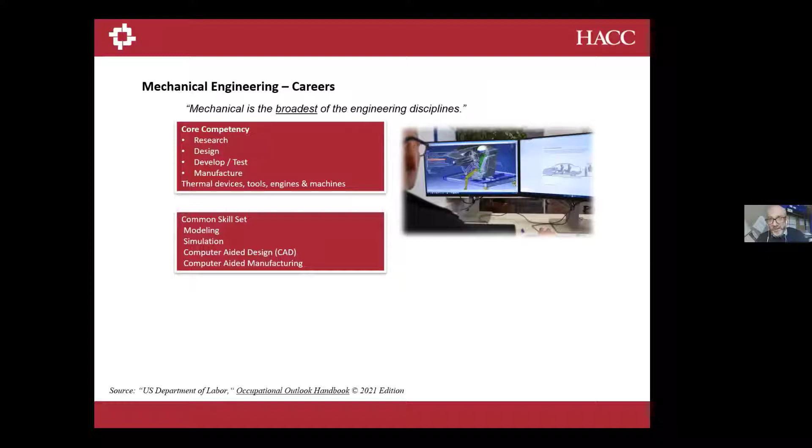If you look at a common skill set, modeling, simulation, computer-aided design is huge in mechanical engineering, and so is computer-aided manufacturing. If you look at this picture, that's a typical workstation - just two monitors. I don't know why electrical engineers usually have 3 or 4, I always would kind of poke fun at them for that, but MEs typically have 2.

Casual dress typically - you can't come to work in rags, but I think a nice pair of jeans, sweater, whatever, it's kind of office casual. I don't know how many jobs are remote right now, COVID has shifted everything, so I think a lot of things are remote. I will say that office spaces have become open the last couple of years.

So you used to be in a real tight cubicle. There seems to be an emphasis on collaboration in engineering now, so open office spaces are a lot more common. It's pretty casual dress, but if you're making a presentation or a customer is coming in, it's not uncommon for the policy to be: don't wear jeans that day. Put it together, look buttoned up. That depends on the company.

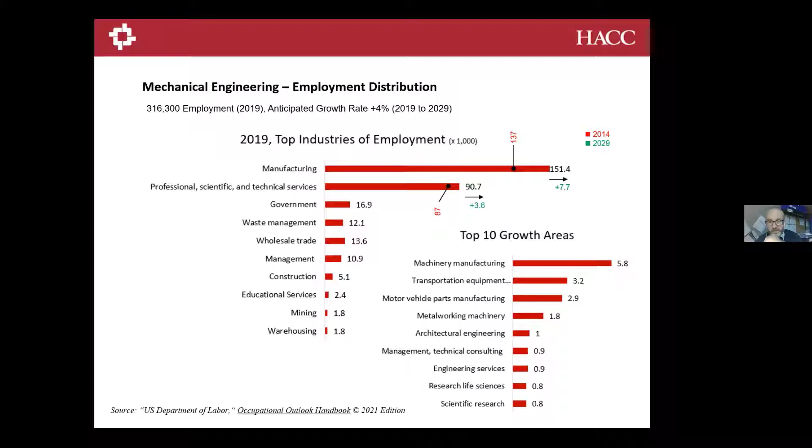And it's good for just local production of parts. If you're going to build a car, you've got to make a lot of parts, and there are a lot of companies in the United States that do that to support the US auto industry. So let's talk a little bit about your education options.

So there are two-year options that you can take. One is to get an associate's degree in mechanical engineering technology. It's a little less math heavy, a little more practical. And when you're done with that, you can just go and get a job. When I was at Phoenix Contact, I think we hired in my team alone, 3 HACC graduates that have 2-year degrees in MET.

One of them designs all the tooling and production, and the other does design work and supports the engineers in development. Really good folks, great at what they do. The other option is to get an associate in science, which is designed to transfer to a 4-year school to get your bachelor's degree. So those are kind of the two out-of-the-gate options.

You can transfer those credits. This engineering degree is always a good thing to have because you can use those credits to go forward for your 4-year degree. So with the MET, you can get a BS MET, I think that's offered at Penn State and several other schools. If you get the associate in science, you can get a BSME, and that's at Penn State as well.

You can also go to a 4-year school, you don't have to go to HACC. You can go to a 4-year school and get an engineering degree. The technology degree in the MET is, again, a little bit more practical. The BSME is a little more science-based.

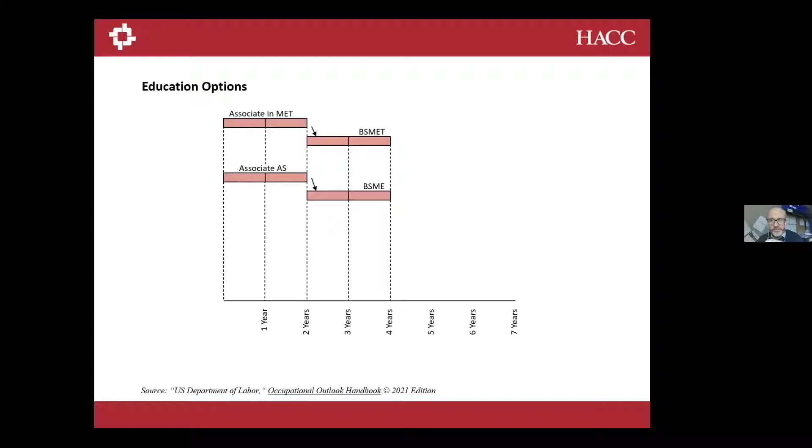I've worked with both engineers with both degrees throughout my career. I have not seen a functional difference in them. I will say if you're going to go to graduate school, I would do the BSME, because if you do the MET, I think you have to take 2 classes before you would start graduate school. So if you're going to do it, I would do the BSME. But those are really good options. And then I'll say the popular paths in graduate study are an MS in mechanical engineering.

It's common to specialize further. I got my master's degree in engineering because I wanted to understand more about the problems I was solving, not because I wanted a particular job or more money. I just wanted more knowledge. An MS or MEng is typical, and the other typical path is an MBA.

When you work in engineering, you'll work in business, and you'll always be expected to make or save your salary every year for the company. Someone told me that my first year, and I thought it sounded so arduous. But once you're an experienced engineer, you'll make or save 10 times your salary every year. You're going to be a problem solver, looking at problems you're given and solving them, and you'll achieve a lot more than that.

But the only reason I say that is because business is part of it. You will talk about dollar signs a lot in your engineering career because you're trying to make the company profitable.

These are the salary ranges at different education levels, based on 2019 data, and they're mid-career numbers, not fresh out of the gate. You can make more or less than this, and you have to be careful—it depends on where you live. It's hard to live in San Francisco on $130,000 a year, so the maximum number isn't really livable there. This is data for the whole country, so you have to take cost of living into account.

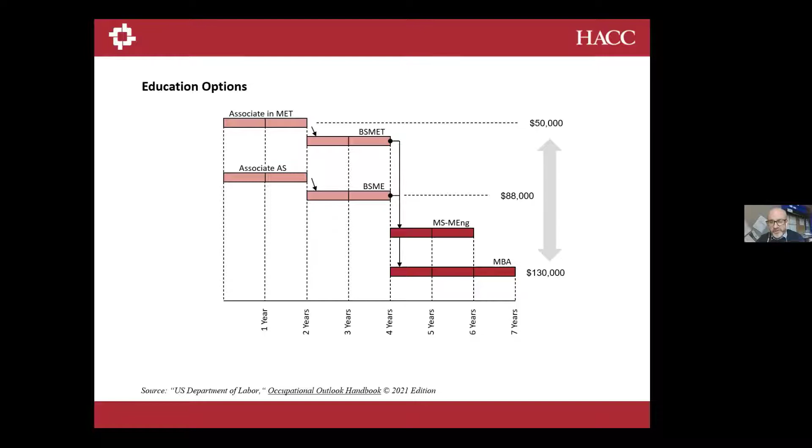Your freshman year is really, really hard, with a real concentration on these rudimentary sciences, and it continues into your sophomore year because there's so much information. By the back half of your first year and all of your second year, you'll start getting into engineering fundamentals.

In mechanical engineering you'll have some group activities and intro to engineering stuff, but you'll also get into statics—the study of forces on things that aren't moving. For example, if you sit on a chair, how much force is the chair exerting into the ground through the legs? That's a statics problem—super fun stuff, pretty math and geometry dependent.

Then you'll do dynamics. If you slide the chair across the floor with some initial velocity, how far is it going to slide until it stops? It's a lot like statics, just more complicated because it involves acceleration and a time element, so the math gets more complicated.

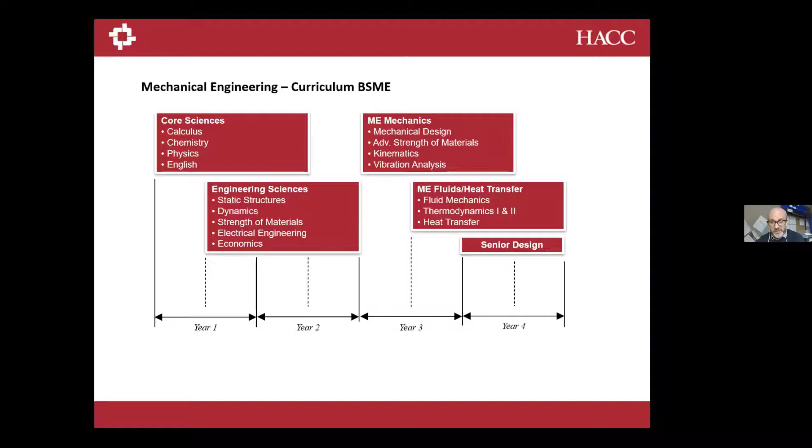There could be a chance you need a professional engineering license. If public safety is at issue and there are local codes you have to comply with, like when you build a building, then you will need a professional engineering license.

I've never needed it in product design because there's so much risk to consumers that I don't do the final testing and certification — that's done by an outside company. If you look at the back of your phone, you might see UL, CSA, CE, IEC, EX. These are outside companies; those products are tested by somebody other than the company that designs them to make sure no one gets hurt. That's the reason I don't have a professional engineering license — it doesn't have much applicability in product design because there's so much risk involved.

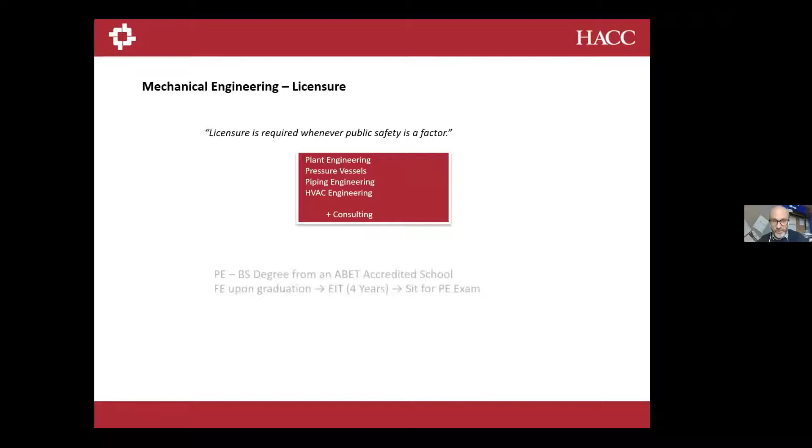So there are a couple paths to a professional engineering license. You can get it with a 2-year degree, or with a 4-year degree. If you have a 4-year degree from an ABET accredited school, you can take the fundamentals of engineering exam. I took mine about a month before I graduated. It's an 8-hour test, multiple choice in the morning and big problems in the afternoon. I took it cold, didn't study, because all that information was fresh in my head having just finished my undergrad, and I passed it.

After 4 years, you have to work with other professional engineers, and if they write a recommendation, you can sit for the professional engineering exam. I didn't do that — I don't work with professional engineers, they're not really in my industry.

If you have an associate's degree, it's the same rules, but you have to work for 8 years before you sit for the FE exam. Then it's the same rules of working another 4 years before you sit for the fundamentals of engineering, and you have to wait another 4 years until you sit for the professional engineering exam. So that is the path to get licensed.

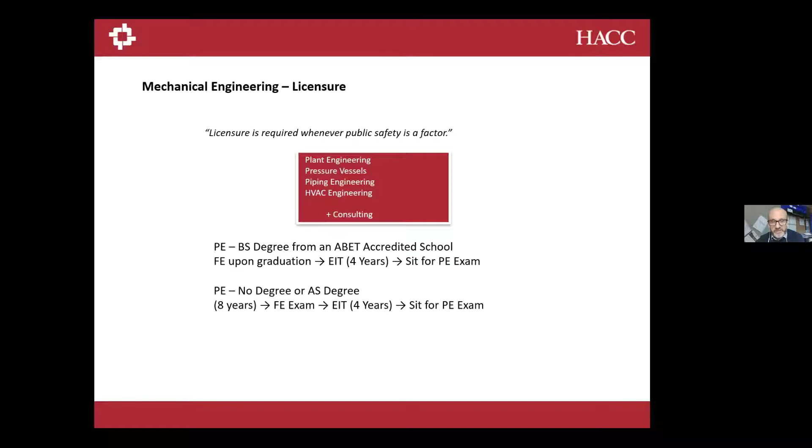I said, trust me, I'm not going to do any of my old tricks or ride the ramp. I have no interest in breaking a bone. So we had the ramp built for 5 minutes, and I immediately took a skateboard and started riding it, doing all the tricks I could do in the 70s. It was awesome. I didn't have any mishaps, didn't fall, didn't break anything.

But about a week later, I went out to tell my son to put the ramp away. There were wheels on it so we could roll it out of the way. It was going to rain, dark clouds everywhere. I went out to say, dude, you got to put this ramp away. It's not painted, it's going to be a mess if you don't.

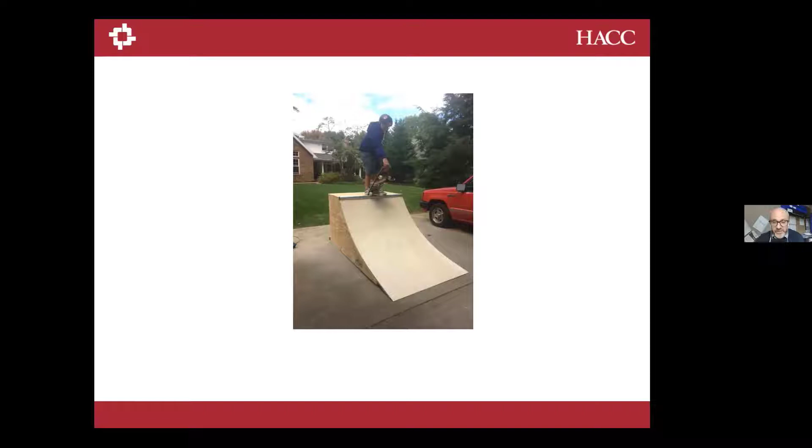The ramp was on our driveway, and I jumped on the driveway on his board and took a push, started rolling across. He had a piece of wood across a little dip at the entrance to the driveway so he could enter from the street before going on the ramp. I took a push, kind of barking at him saying, dude, come on, help me get this ramp. My body was turned away from where I was looking.

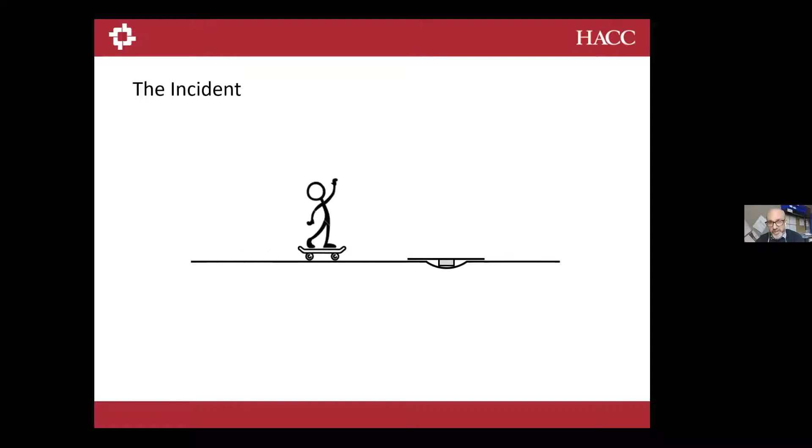I hit a little pebble on the driveway and didn't have enough inertia to get over it. So the board stopped, and I chucked myself right onto that board, knee first. That was the accident. I tried to pretend I wasn't hurt until the next morning when I couldn't get out of bed. Went to the doctor and realized I broke my kneecap. So I got that all taken care of.

I was sitting around the next weekend, bummed because I couldn't do much of anything. I was sitting at the kitchen counter with my knee wrapped, thinking, I'm bored, I don't know what to do. There was a bunch of paper there, a calculator, a pencil. I was like, I wonder how much force I put on my knee when I hit that board, because I cracked my patella.

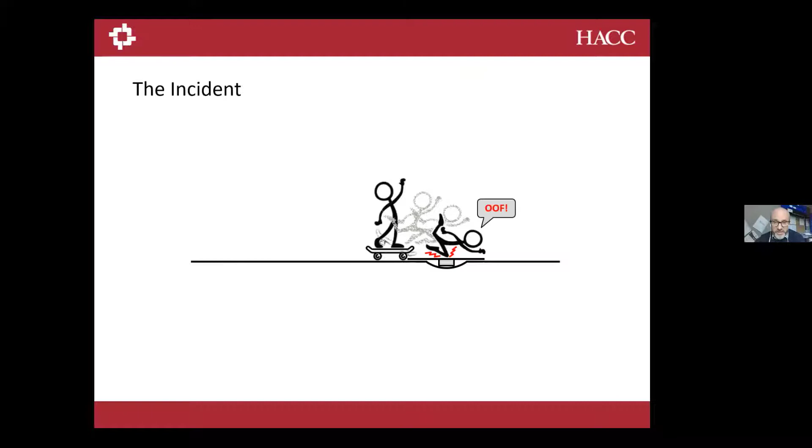So I just started playing around with some numbers. I know my weight, I know the height of my kneecap, let's figure out how fast my kneecap was going when I hit the board. I used work energy — this is dynamics, second year stuff you would do. I was going about 1 foot per second horizontally. My kneecap sped up to about 10.5 feet per second vertically, so I accelerated quite a bit.

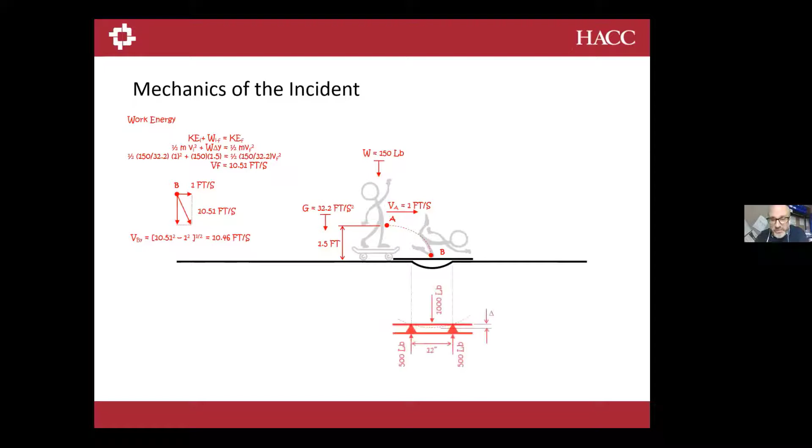Then I know the geometry of that board, so I can look at this as a simply supported beam — a little bit of statics and strength of materials. I know what type of material and what the geometry of that board was. So what I did is throw a 1,000-pound weight on it to get a stiffness. Engineers talk in stiffness all the time, mechanical and structural engineers.

So it looks like about 16,300 pounds per foot, a super stiff beam, right? If you pushed with that much you would break it, but it's not that springy. It's really stiff. Everything has a stiffness and a spring rate.

I got pulled over once for a speeding ticket on the South Bridge in Harrisburg. I couldn't believe how much my car was jumping up and down when trucks went past. So even though that big bridge looks infinitely stiff, it's not — it's springy, it actually has a stiffness to it.

So what I wanted to do is figure out — okay, I know a couple things now. I know the spring rate of that board, and I know my knee was moving 10.4 feet per second when I hit the board, and 0 feet per second when it stopped.

So I wanted to figure out how far I compressed that spring. I went back into the work energy equation and figured I compressed it about 0.18 feet. Doesn't feel quite right, but let's go into Hooke's law, use the equation for stiffness, and back out how much force that would be. So wow, 2,900 pounds — that's quite a bit.

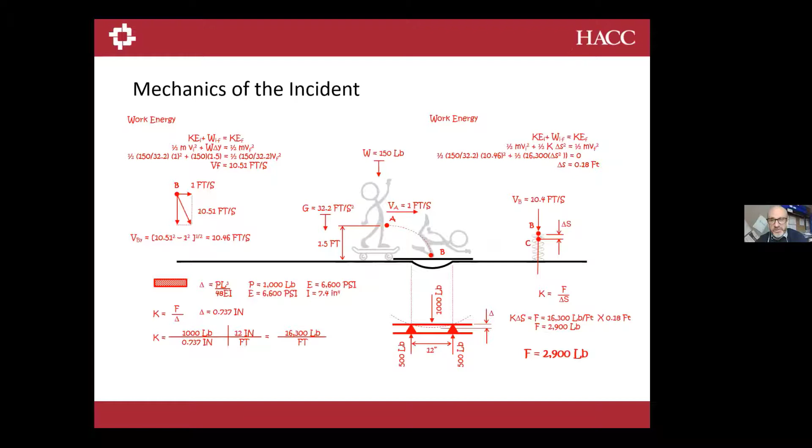But it was just kind of fun to do the calculation. And these are just examples. I mean, this is all stuff that you would learn, I'll say, second year in mechanical engineering. It's just application, and no matter what you do in really cool analysis, in computer and in simulation, it all starts with this kind of fundamental understanding of what you think the answer should be.

Computer programs now are pretty robust. You can put in bad information and get an answer. In the infancy of analysis in computers, the computers were super picky. So if you put in, say, material properties or something that didn't make sense, the whole system would just crash on you and lock up.

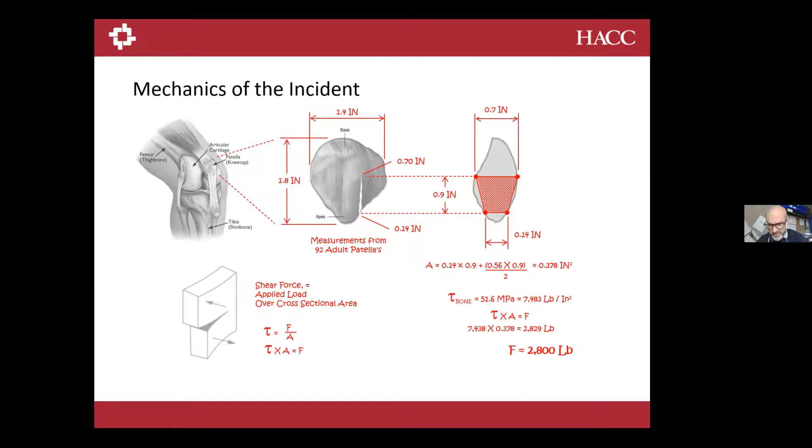That's gone away. So a lot of times when we do an analysis in the engineering world, we start with some hand calculations to figure out where should we be, where's our ballpark. And then we should be able to explain the difference between the simulation and the hand calculation.

So if you look at what's going on in mechanical engineering, this is really all the cool kind of product development stuff. I have simulation packages in my business. I can do impact testing.

Drop testing of something that you ship is a big deal, especially in consumer goods. At Phoenix Contact, we had to drop things three times on the same spot from a meter, and they still had to work and not break.

And there's a lot going on there. I mean, everybody drops their phones. Dropping your phone without a case on it is super dicey. But with the cases, they do really, really well.

You can do strength testing. I'm a biker, so this is just a crank at the bottom bracket to look at the stress and deflection behavior. Plastics flow - I do a lot of plastic part design, so you can simulate how the flow is going to enter into a part and fill and give you part quality.

And then the fluid flow stuff is really mathy. If you look at simulating flow, like through a turbine on the right, we're doing computational fluid dynamics for airflow inside an electronic housing.

I know with the heating of electronics, we did a lot of that at Phoenix Contact. It took us about 3 years to get good at running those analyses and getting the right answer. We could simulate, depending on the position of an electronic product, whether or not it's going to exceed the rated chip temperatures. If you look at any printed circuit board and all those chips on it, every one will operate differently cold than it does at ambient, than it does at hot. If your iPhone stops working when running in the cold, it's because it got too cold. If your GPS phone is on the dashboard cooking in the sun, it could quit. It's because the electronics don't behave the same way cold and hot.

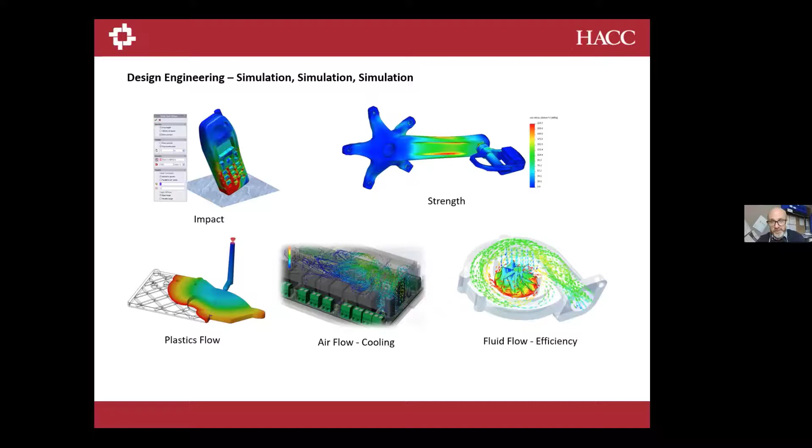So we did simulations to predict how hot chips are going to get before we even build anything. That saves a lot of money, saves a lot of time, and it's mechanical engineering stuff through and through. In your careers as engineers, that's going to get bigger and more generally accepted, as people learn more about it all the time. So those are the types of things you can do in mechanical engineering, and it's likely what'll be done. I just think there's so much cool stuff going on right now mechanically.

I really like what Tesla's doing in general. I think their SpaceX stuff is fantastic. I went and saw Tesla at the King of Prussia Mall, where they had the whole body off the car, and it's like, wow, there's not much to this mechanically. This is going to be revolutionary if we can ever get the batteries to work.

Boston Dynamics is doing the kind of scary robots that do backflips and gymnastics routines. Reminds me of Terminator, so I find it a little frightening, but that's all mechanical engineering. Self-driving cars are awesome. I'm a mechanical engineer that doesn't like to drive that much, so I feel like it's wasted time, so I'm looking forward to self-driving cars. And production and manufacturing is going to be significant in the United States throughout the span of your careers. I think there's really exciting stuff happening.

I like mechanical engineering the most because you're working on tangible things—things you can physically pick up, show people, and that people use, that aren't in the ether. That's not to make a slight at software or electrical engineers. I've worked with them my whole career and I'm humbled by what they do. You'll work with other engineers throughout your whole career, and watching what they have to do to get something to work with firmware on it is humbling. It's a very, very challenging, cool job as well.

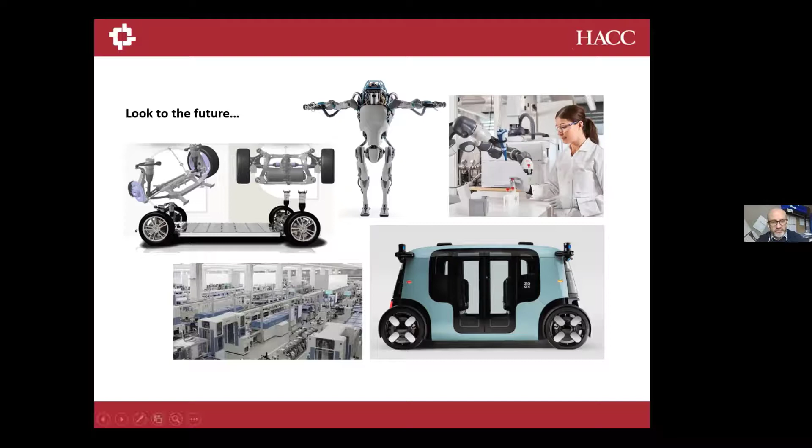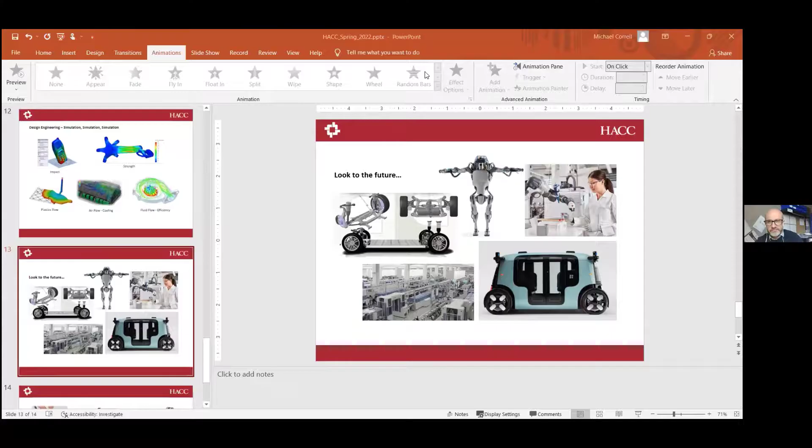Biggest misconception about mechanical—do you want to try it or do you want me to take it, Mike? That's an interesting one. I don't have much, Forrest. I mean, maybe that we just use wrenches and work on cars. I think that's maybe, I would kind of go with that. Mechanicals end up anywhere because just about every interface you have with the world involves some kind of mechanics. So it's not just cars, and there's lots of industries with mechanical engineers.